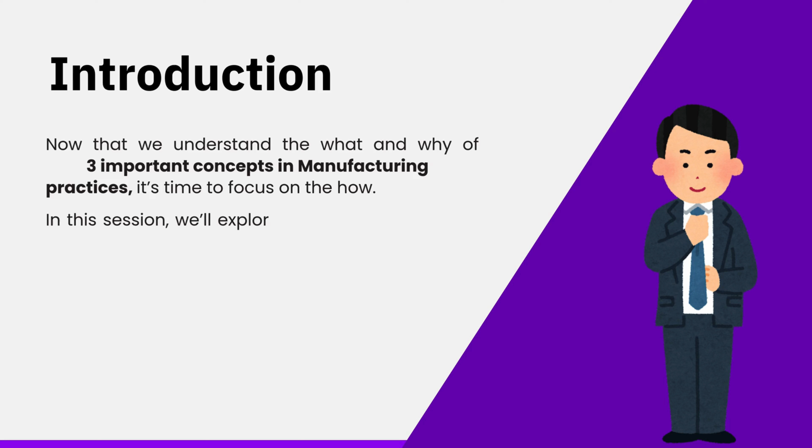Now that we understand the what and why of three important concepts in manufacturing practices, it's time to focus on the how. In this session, we'll explore simple, practical steps to bring part identification, traceability, and FIFO to life on the shop floor, turning good intentions into strong daily habits. Now, time to walk through a few case studies to make this concept come alive.

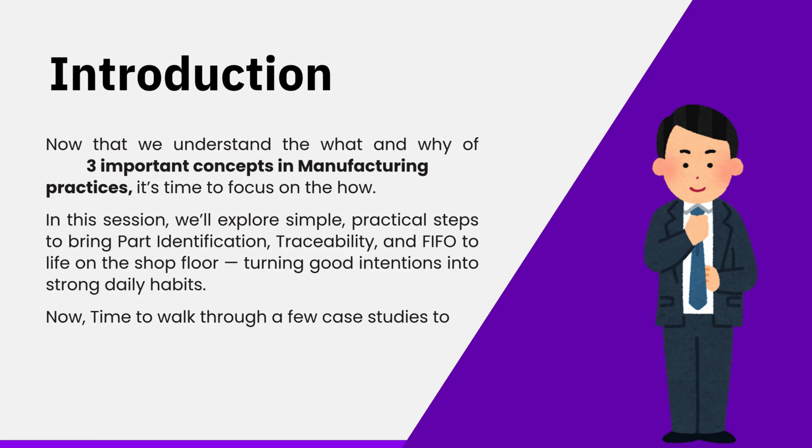Bringing part identification, traceability, and FIFO into daily practice. Part identification. Assign unique codes. Every part must have a unique identification code to enable complete traceability across production and supply chains. Using durable methods. For long-term reliability, especially in high-value or safety-critical parts, methods like barcodes, RFID tags, or laser-etched markings could be used.

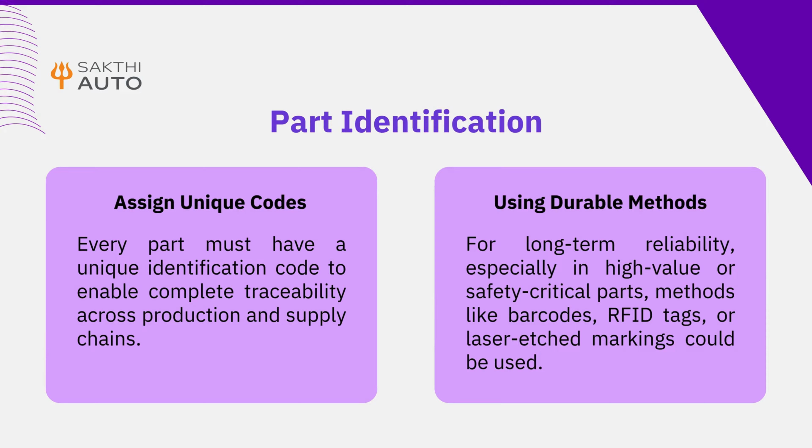Traceability. A strong traceability system enables faster root cause analysis, supports regulatory compliance, and improves recall management, boosting overall operational reliability. FIFO, first in, first out. Storing by arrival or production order. Ensure materials and parts are used in the exact order they are received or produced to maintain inventory freshness.

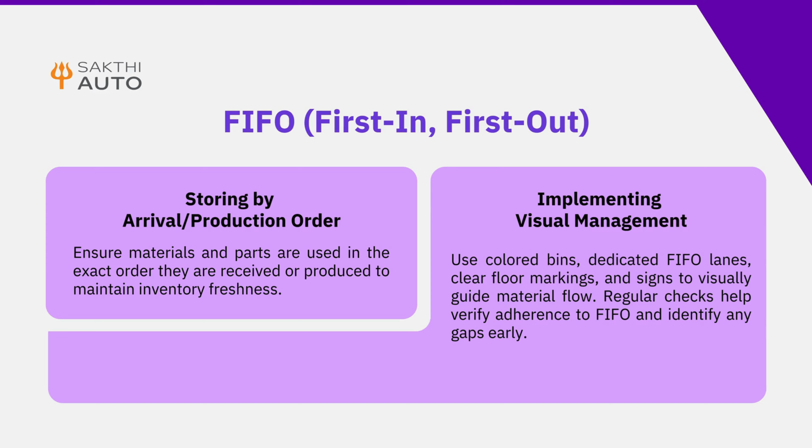Implementing visual management. Use colored bins, dedicated FIFO lanes, clear floor markings, and signs to visually guide material flow. Regular checks help verify adherence to FIFO and identify any gaps early. In short, consistency, documentation, and discipline are the keys to successfully implementing part identification, traceability, and FIFO practices on the shop floor.

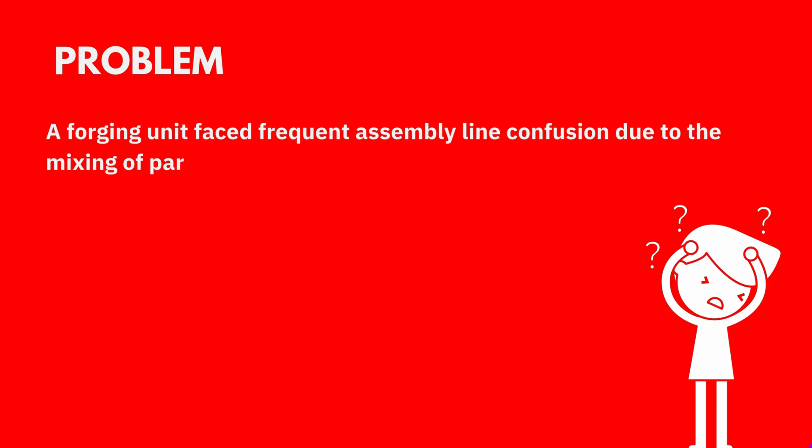Use cases. Part identification. A forging unit faced frequent assembly line confusion due to the mixing of parts with similar appearances but different specifications. This led to part mismatches during assembly, high rates of rework, disrupted workflow balance, and productivity loss.

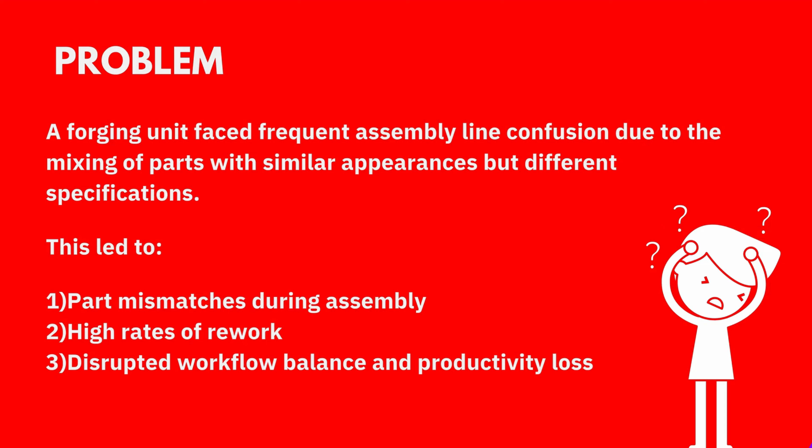To address this challenge, the unit implemented a barcode-based part identification system, assigning a unique barcode to each part variant. Barcode scanners were introduced at critical checkpoints such as the picking stage, the pre-assembly stage, and the final inspection stage. Furthermore, it was ensured that each part was scanned and verified at every step to guarantee correct part usage.

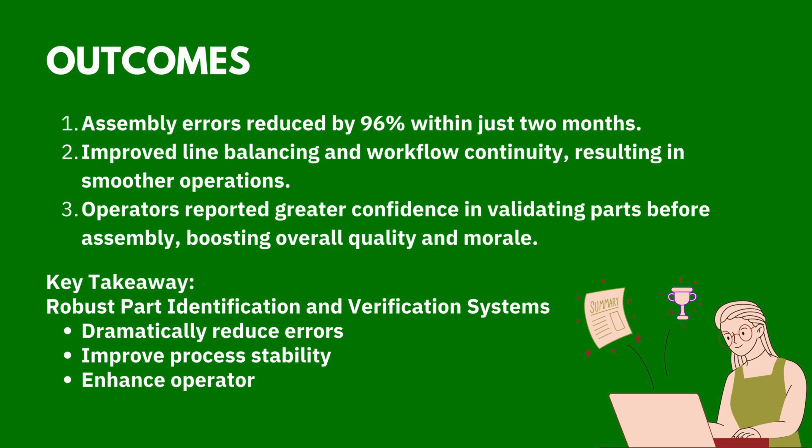As a result, assembly errors reduced by 96% within just 2 months. Improved line balancing and workflow continuity, resulting in smoother operations. Operators reported greater confidence in validating parts before assembly, boosting overall quality and morale. Key takeaway: robust part identification and verification systems dramatically reduce errors, improve process stability, and enhance operator ownership.

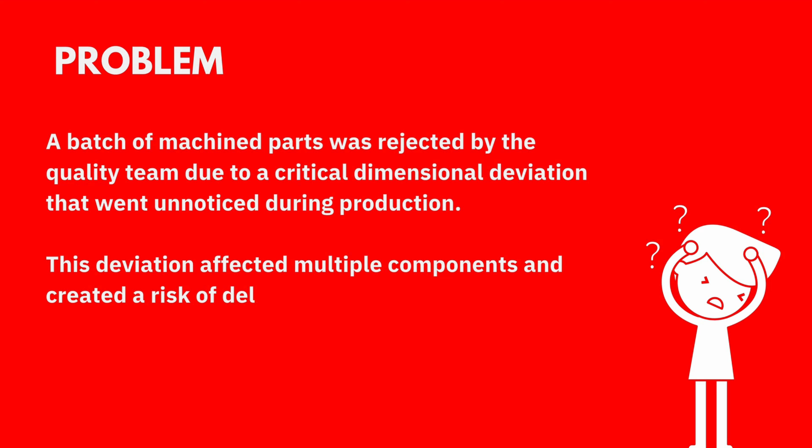Traceability. A batch of machined parts was rejected by the quality team due to a critical dimensional deviation that went unnoticed during production. This deviation affected multiple components and created a risk of delayed dispatch and customer dissatisfaction. To address this challenge, we leveraged plant traceability records to quickly identify the specific operator, the machine used, and the shift during which the defective batch was produced.

Conducted a targeted investigation, revealing that the root cause was an incorrect gauge setting. Immediate corrective training was provided to the concerned operator and shift team. Inspection protocols for that dimension were strengthened to prevent recurrence. As a result, root cause identified and resolved within 24 hours, minimizing production and dispatch disruption.

No further dimensional deviations were found in subsequent batches. Operator accountability strengthened, and confidence in traceability systems significantly improved. Key takeaway: effective traceability transforms problem solving, turning potential crises into quick, controlled recoveries.